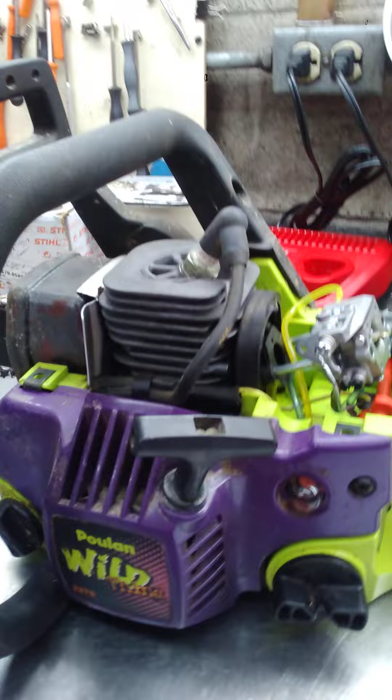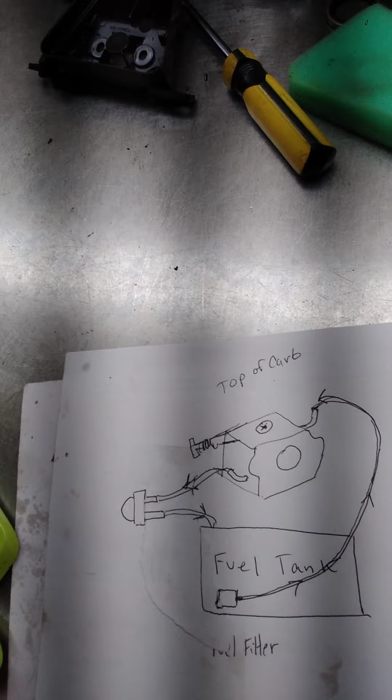American Patriot 1965 here. I'm going to show you a little something that confuses a lot of people about fuel lines on chainsaws. I'm going to show you the brand, show you the carburetor setup, and show you a diagram that shows you how this works.

You have fuel lines that go into a primer bulb, that come out of the tank, go back into the tank, go into the carburetor. It's confusing, right? Well, if you'll notice, small line, bigger line. That's important on these Poulans, Craftsman, Husqvarna. All these usually pretty much have the same setup, these smaller, cheaper saws.

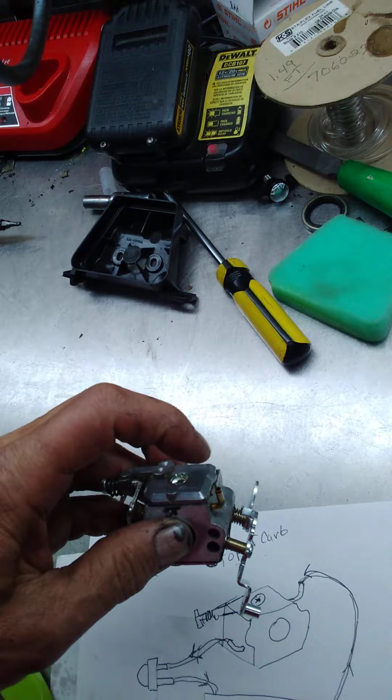So to make it simple, I'm going to show you on the carburetor here. That's the top of the carburetor. That outlet right there is where that hose is. That outlet is right there. This is the same type of carburetor I have in the drawing.

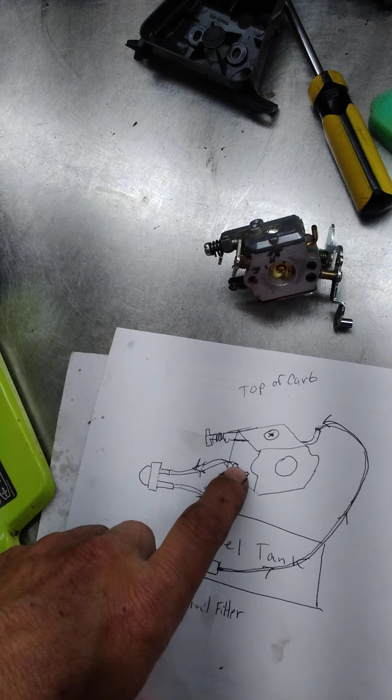And if you'll notice, the smaller line comes from the tank with the filter to the top of the carburetor where that screw is. And then this tube comes out of this carburetor, goes into the primer bulb, and back into the fuel tank.

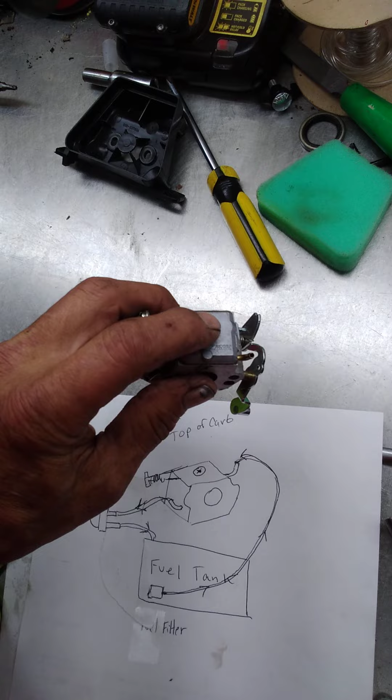The shorter nozzle on the primer button will be your draw. That's your suction. It sucks the fuel through the carburetor coming from the top because there's a filter just underneath this cap here. When you look right here underneath that, take that screw off, there's a fuel filter in there.

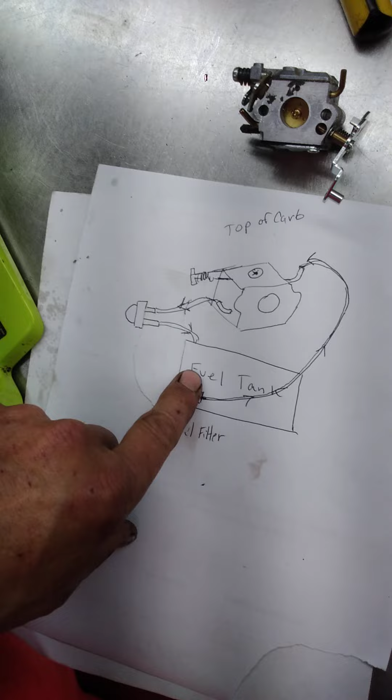So that means the fuel comes in here, has to go through the carburetor and come out here. That's what I've got in the diagram. Carburetor, the fuel comes out of the tank to the top, through the carb, through the primer, and blows it back into the fuel tank. So small line, bigger line, and that's the way these are set up.

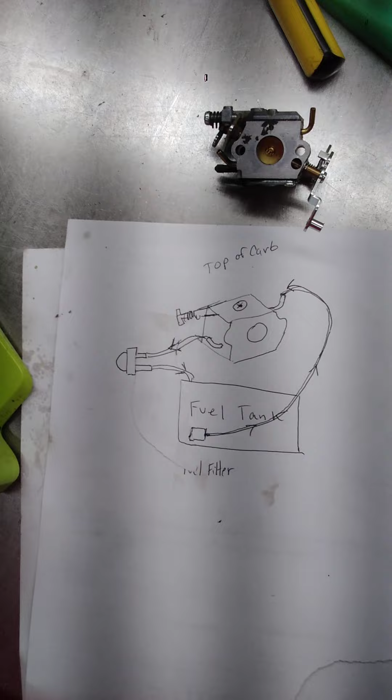And that should be a pretty good reference to show anybody how to replace the fuel lines, at least hook them back up right if one of them comes unhooked. And if you'll notice, the bigger line is in the right corner, smaller line is in the left corner. That small line goes over and sits in the bottom of the tank with the fuel filter on it.

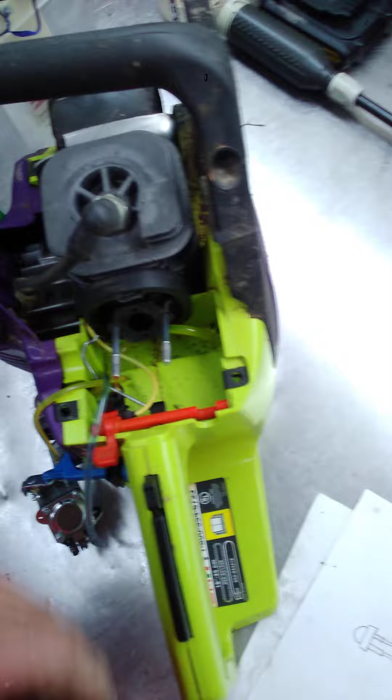And so that's it. That's your quick reference on how to hook one of those back up and get the fuel lines hooked up correctly, because people bring them in all the time saying I've done everything to it, I can't get it running. And I say, well, you just got your fuel lines hooked up wrong. And a lot of times that's what it is.